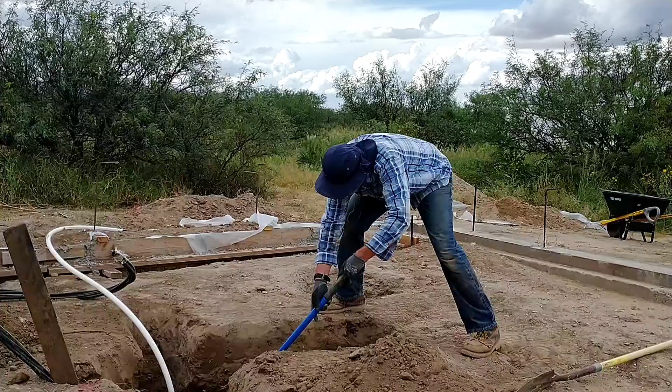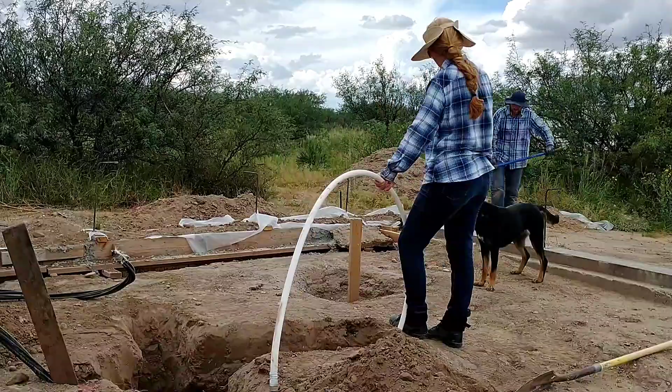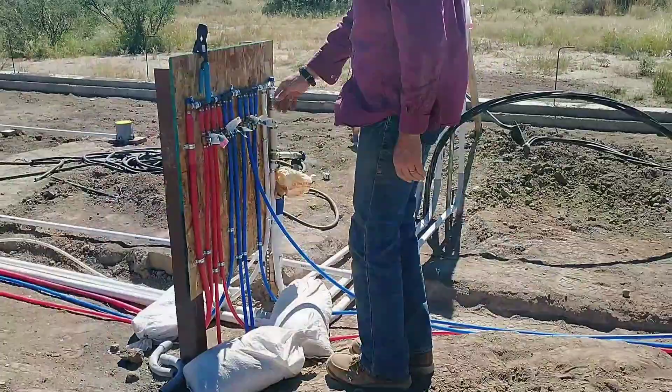Today we will be revealing our home design, and we'll show you some drawings, a 3D walkthrough, and then discuss why we chose the design and the benefits of the design we chose. I'll start by giving you just a little history on where we're building the house and what we've done so far. So about a year ago we bought some undeveloped land. It was absolutely perfect. There's no wires or pipes coming into the property from any direction. It's truly an off-grid property.

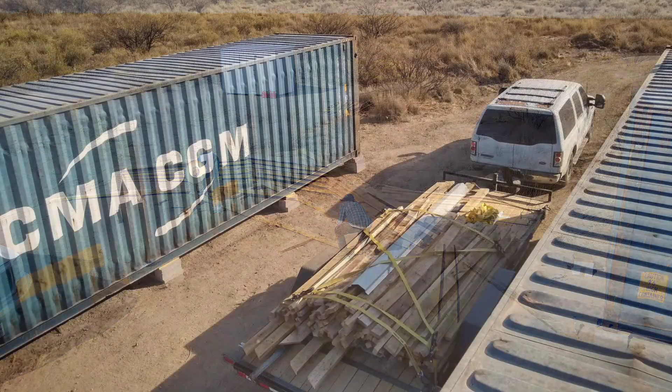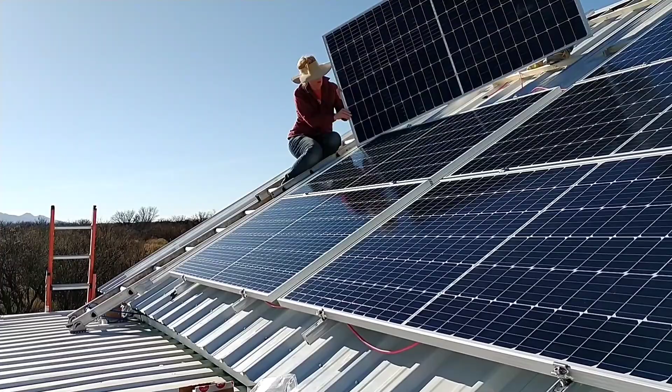The first thing we did was to have a well drilled, and then we built out the well house. Then we built a barn that was open-sided that we could use as a shelter for our RV. It also doubles for storage, a workspace, and was the structure that we built our solar rack on, our solar panels on. And it also houses our solar room, so it houses our entire solar system. So we did go ahead and build the solar system.

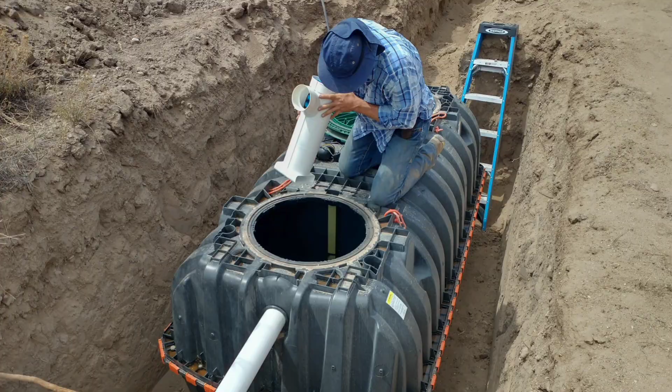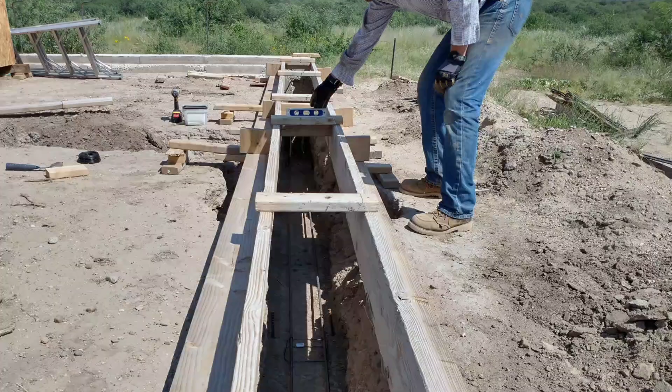That's done. The last utility that needed to be completed was the septic system. I did that myself as well, and when that was completed, we started on the foundation work for the home. For the last 6 months, we've been living in an RV parked under the barn shelter that we made. While we've been working on the utilities, we've also been trying to settle on a home design.

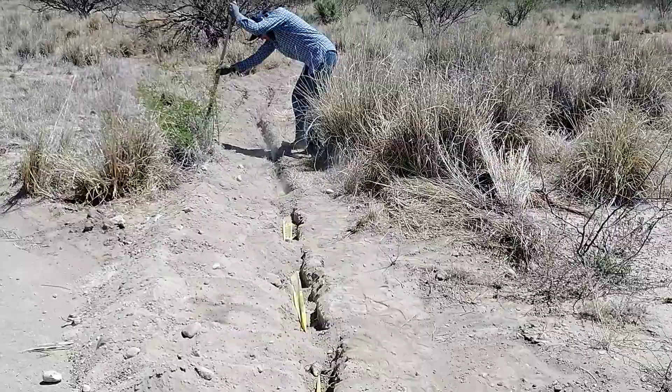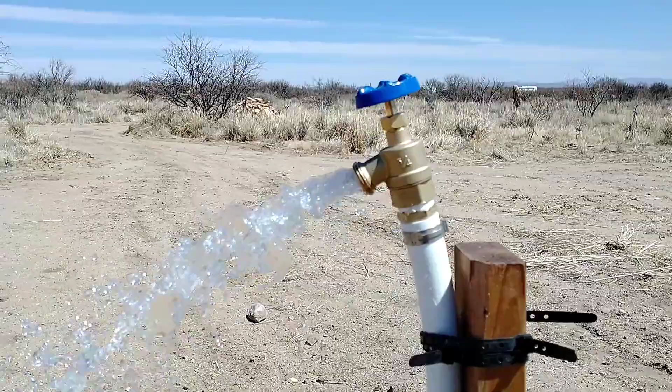The first thing was to decide what kind of style of build we wanted to do. We knew we wanted to do a do-it-yourself alternative building method. And so after reviewing many, we settled on Aircrete as the choice for us. There are several reasons we chose Aircrete. First of all, it is a process that is do-it-yourself. A couple people working together can do it all by themselves. It's a fairly cost-effective way to build, fairly low cost, relatively speaking.

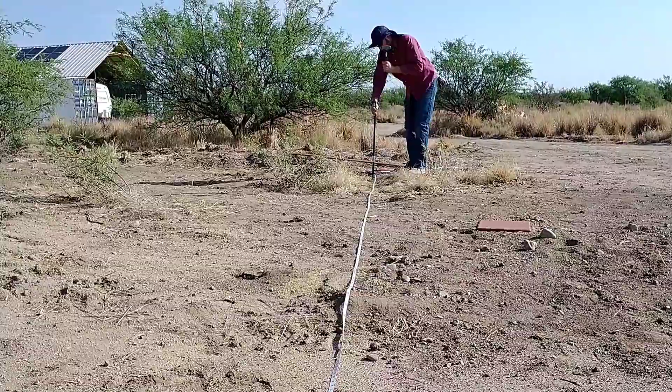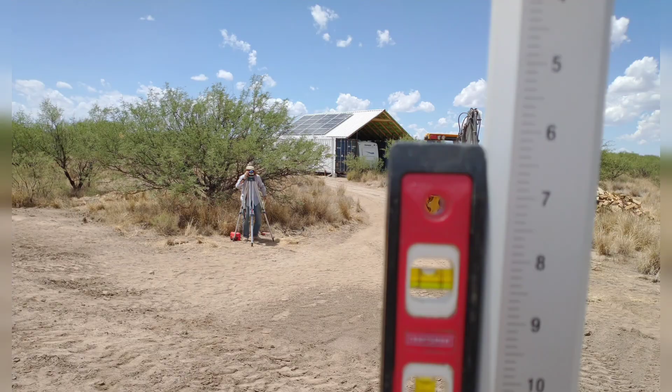And we loved several aspects of the durability of Aircrete that just can't really be matched in a lot of other building methods. So first of all, it's very fire resistant. It doesn't burn. It's pretty much insect proof or completely insect resistant. It's rot proof, and it can have a very high R value depending on how it's built. So that makes it very energy efficient.

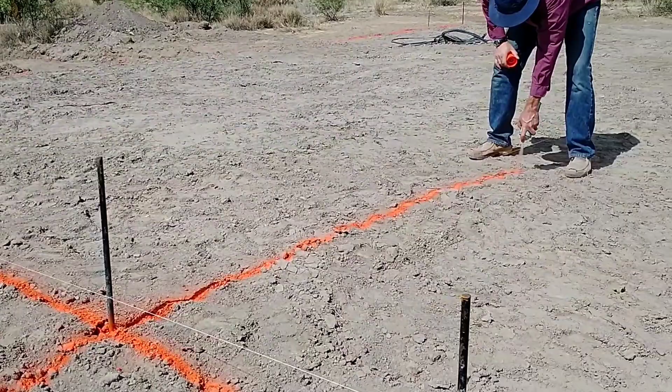The area that we live in is a desert area. There's a risk of fire. Insects are horrible. We needed something with a good R value to be a comfortable home. We're looking at building a home that we don't have to put a lot of energy in to heat and cool. And so Aircrete fit the bill on all accounts.

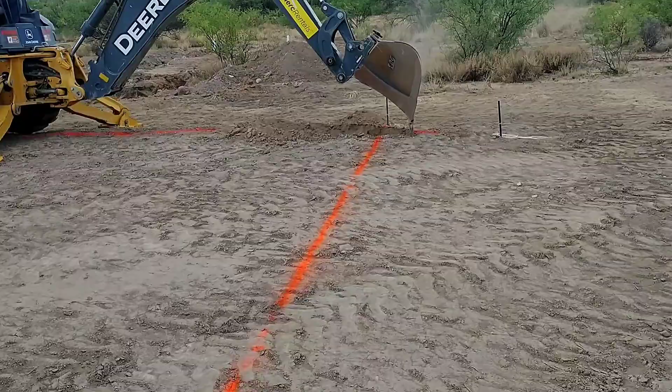Another big advantage of Aircrete that I forgot to mention is the amount of labor that's required to perform the work and to actually build the home. It's much lower than some of the other alternative building methods that we were looking at. And that was very appealing to us. We wanted to be able to build it ourselves, just 2 people, in a reasonable amount of time without killing ourselves. And so Aircrete seemed to be a good solution for that.

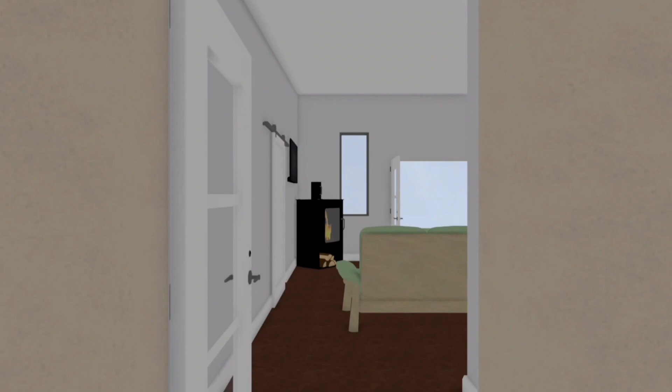So once we decided that Aircrete was the material we want to use, we needed to decide on some of the specifics of the home design. And the first was to figure out the shape. Do we want to go with a traditional style home or something like a dome? We chose the traditional, so we'll be building a kind of a traditional box style home. And then we had to settle on the size that was right for us. We didn't want to build a home that was too big because extra space takes up extra energy to heat and cool. And so we wanted something that was energy efficient and just the right size for us.

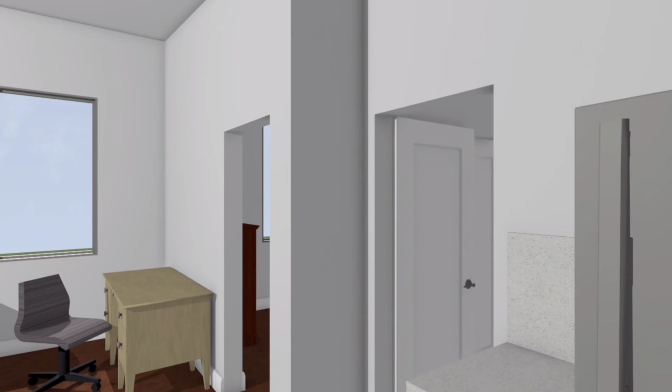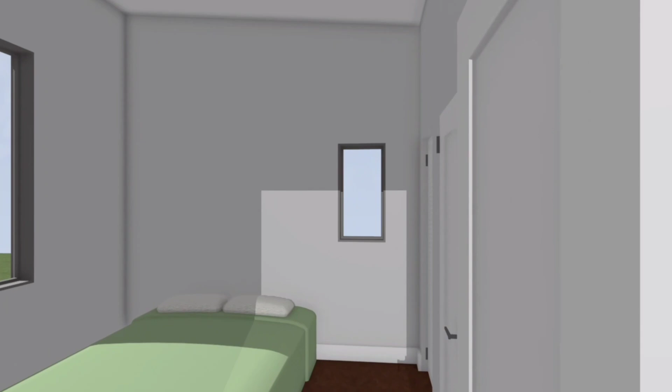We also decided that we wanted to build a simple home, so clean, simple lines, kind of a modern design. We didn't want a lot of extra fancy roof features or wall features, just straight walls. A simple slab roof is what we're going to be building. So just a simple structure, and part of that is so that it would be easy for April and I to build and won't take too long, and it'll just be a good functional structure and a functional shape.

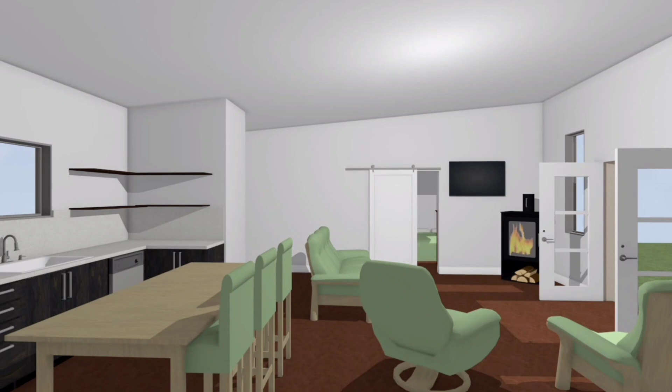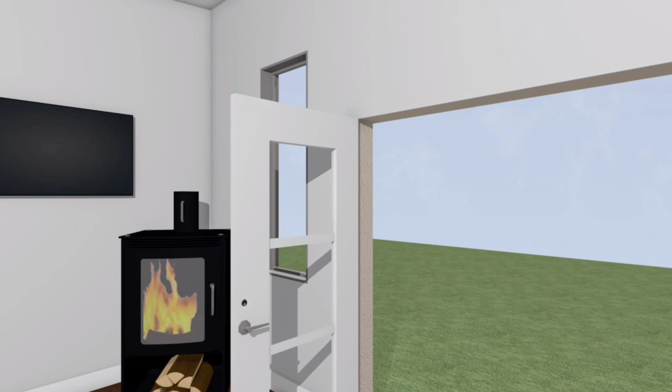So the footprint of our design is 24 by 50. That's the size of the footer, and that gives us a 1,200 square foot home. So it'll be a 1,200 square foot house with 2 beds and 2 baths. The next thing we needed to consider was the orientation of the home on the property. We ended up orienting the long wall, the front of the house, due south, and that allows for the best use of thermal energy and passive heating and cooling. We also decided to build a simple, flat, low-pitch roof with an overhang in the front that has several advantages for us.

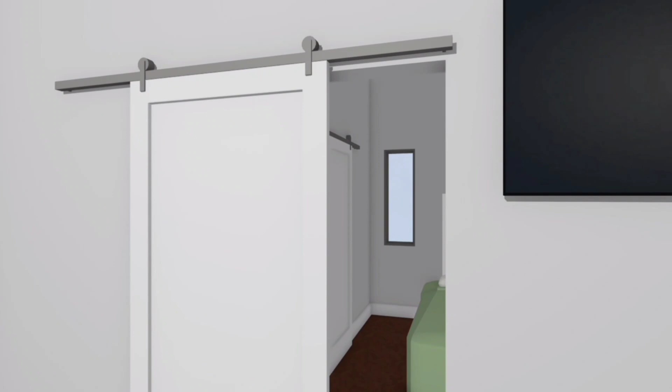That long overhang, it'll stick out about 5 feet in the front, and that 5 feet of overhang will provide shade in the summer months for the front of the house, which is that long wall that has all the windows. So in the summertime, large 5-foot overhang will provide shade, and the rays of the sun will never actually directly hit that side of the house at all, but it'll let in plenty of light.

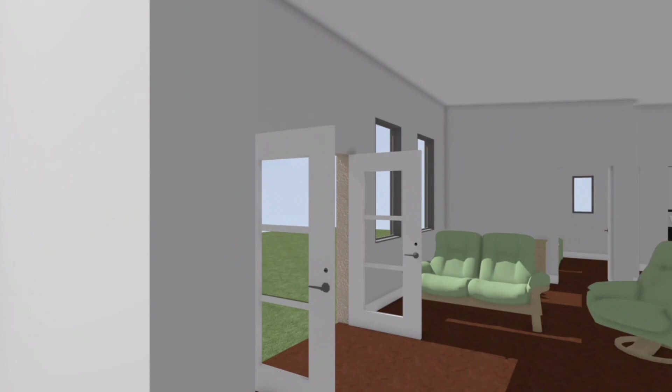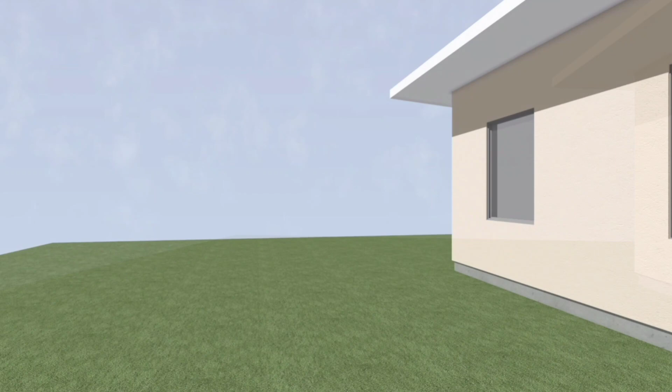In the wintertime, the shadows will change, and the sun will be at a lower elevation, and so it will actually shine in directly underneath the overhang and into the windows of the house, and it'll bring all that radiant warmth into the house during the day, where the thermal mass of the house can soak up that energy and then radiate out that energy throughout the night. And so that's where we get our passive kind of heating and cooling, due just completely to the orientation of the house and the amount of overhang that we have on the front of our roof.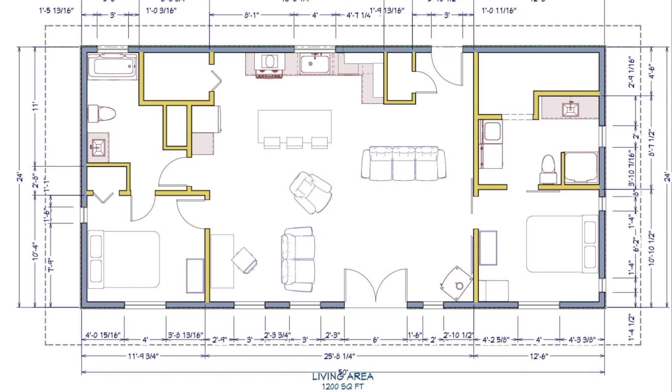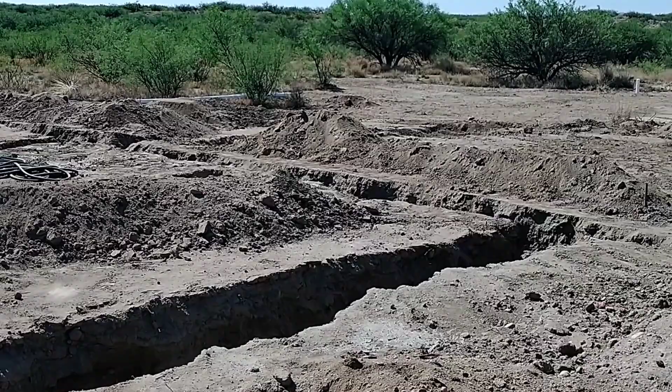In order to make the house as energy efficient as possible, we decided to go with good thick walls and good thick roof. So the walls will be 8-inch thick poured Aircrete walls and should have good R value, good thermal insulative value, and also some amount of thermal mass. The roof we plan to make out of a slab of Aircrete also, probably a lighter mixture with a higher R value, and we plan to build that 10 to 12 inches thick, so have a really good R value in the roof. It ought to be a good, warm house that serves us well in the hot and cool here in the desert.

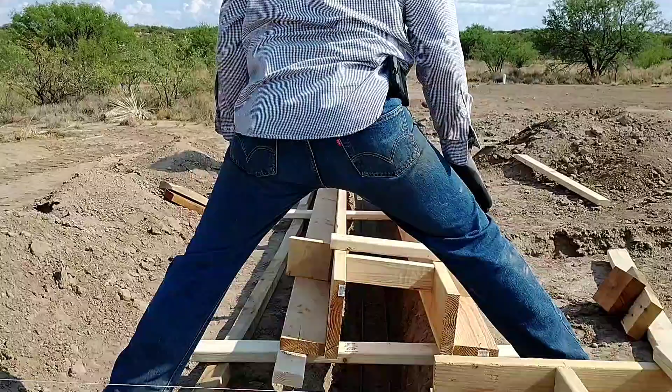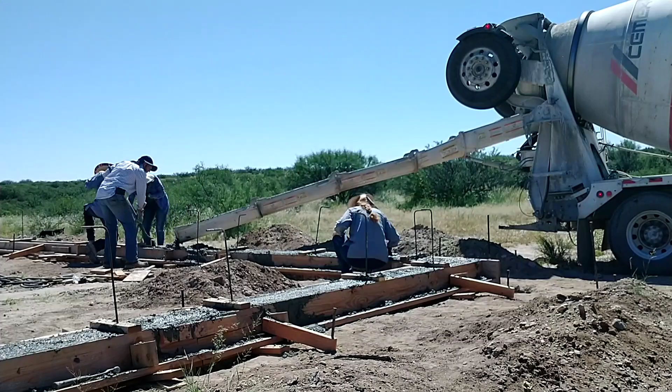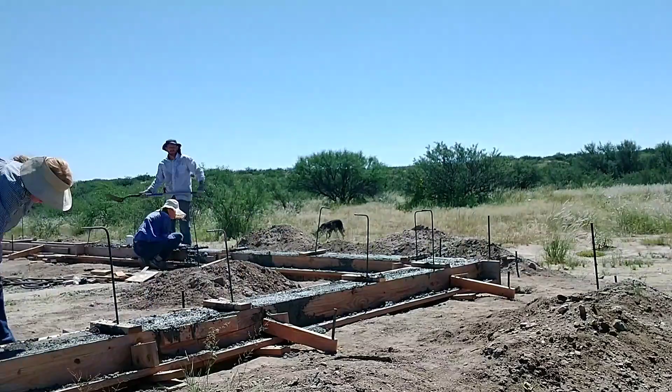With these features, we're hopeful that in our mild climate, we will not need to add heat to the home to keep it warm in the winter. We know other people in this area that have energy-efficient homes, and they actually don't have a heater installed in their house. We don't think we'll need to add a lot of heat to our home in the winter, and we're hoping to be able to control the cooling in the summertime through the use of an evaporative cooler, fans, and natural ventilation that we build in.

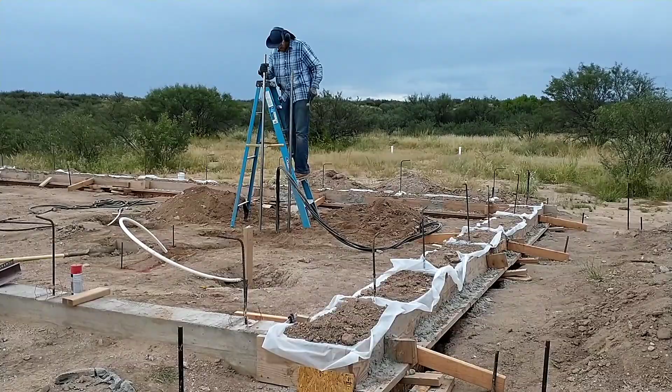We are also making accommodation for the possible future addition of a mini-split air conditioning / heater system. If we decide that we need it sometime in the future, everything will be ready and it'll be easy to install. Another consideration in the design was the aesthetic.

And we like the modern aesthetic. We've just always liked modern or mid-century modern. And so we've always had it in the back of our minds to create a modern looking home. One thing that we really like about Aircrete is that it's a finished product. So when you build an Aircrete wall, that's the entire wall. When you pour a wall with Aircrete in forms, when you take those forms off, you plaster the interior and exterior layer, maybe with the mesh underneath. But when you have finished that product, your wall is completely done. There's no other additional exterior or interior coatings.

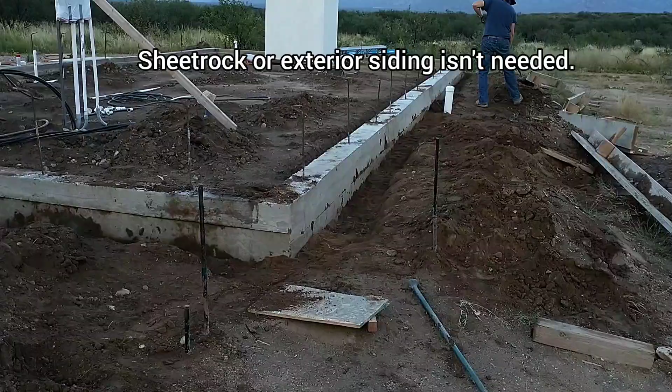So that's how our Aircrete home design came together. It should be a house that doesn't require a lot of energy input to heat or cool, and we should be able to do it all with our solar system. At least that's the plan. As far as where we're at right now, we've just finished up completing the footer and putting the utilities into the pad. And so the next exciting part for us is going to be moving on to pouring the cement part of the pad. We're hoping to use Aircrete for that.

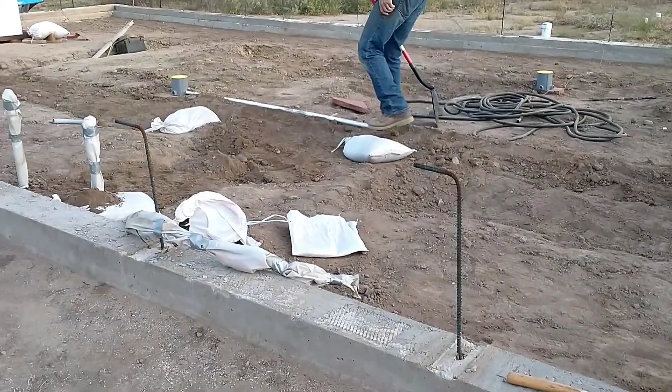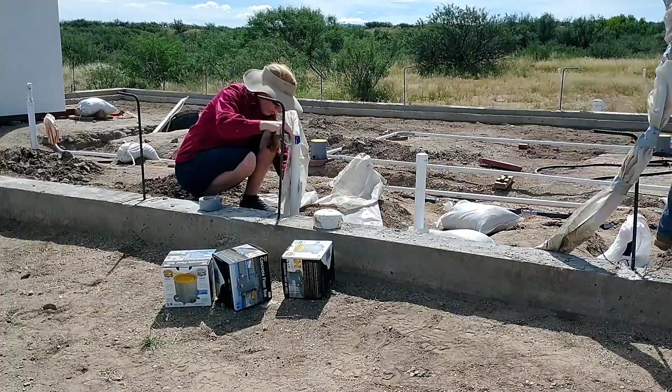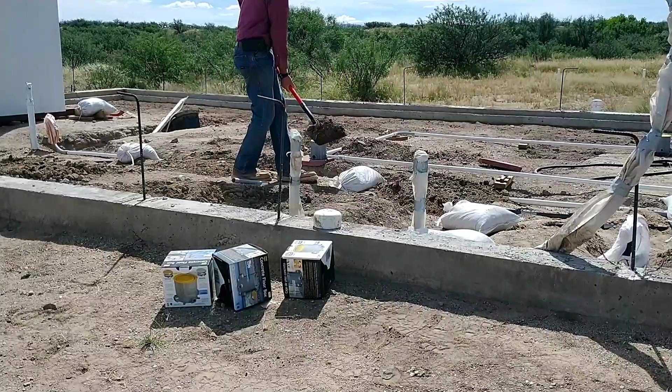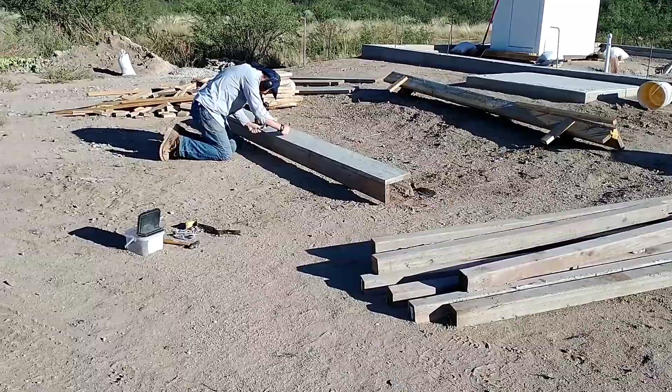We need to develop a recipe that we're going to use for the floor. We also need to develop a recipe that we're going to use for the walls and a different one for the ceiling. And there's going to be some experimenting that we're planning to do in order to get the data that we need to feel comfortable with the mixes that we end up using. So that's coming up next. We're going to be doing some experimenting on different Aircrete mixes, getting our feet wet in using Aircrete. And as we're creating these experimental batches, we're going to be using the remainder of the batches to build a garden wall. So that's what's coming up next.

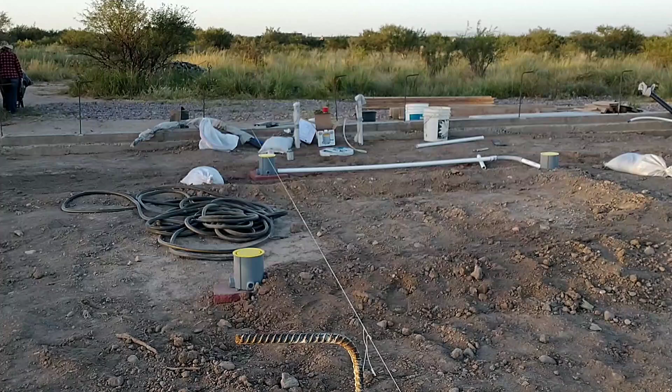As we go through this process of building this home using Aircrete, we also plan to keep good track of the costs and post those costs occasionally so that you can not only see how far we've got and how it's going, but how much it's costing as we go along in the build.